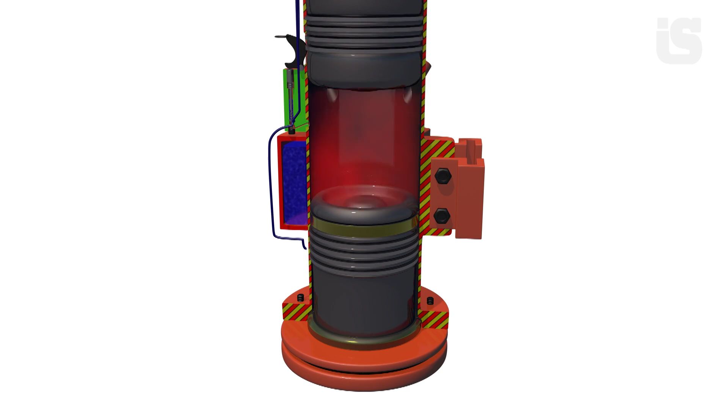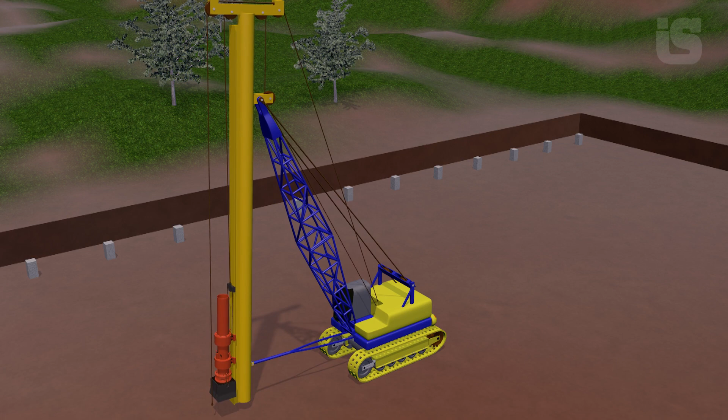Diesel pile drivers are designed for driving reinforced concrete and metal piles and sheet piles into the ground when constructing foundations in both civil and industrial construction. Let's look at a pile driver based on a crane or cable excavator. A diesel hammer with a head attached to it can move along a guide mast.

The pile driver pulls the pile up and sets it in the design position. The driving cap of the pile hammer is placed on the head of the pile. A shock-absorbing gasket made of rubber, wood, or other elastic materials is installed between the pile and the head.

The striking part, hammer, is lifted by a winch and dropped from a height. When the striking part falls, diesel fuel is injected. Detonation occurs. The impact energy drives the pile in, and the energy of the explosion throws the striker upward for the next cycle.

If the pile is deeply embedded at the beginning of driving, the hammer may not start even after several attempts. And when the pile is difficult to drive, the hammer may start. The working hammer is stopped by the tension of the rope attached to the fuel pump plunger lever. Let's take a closer look at this process and the design of the diesel hammer.

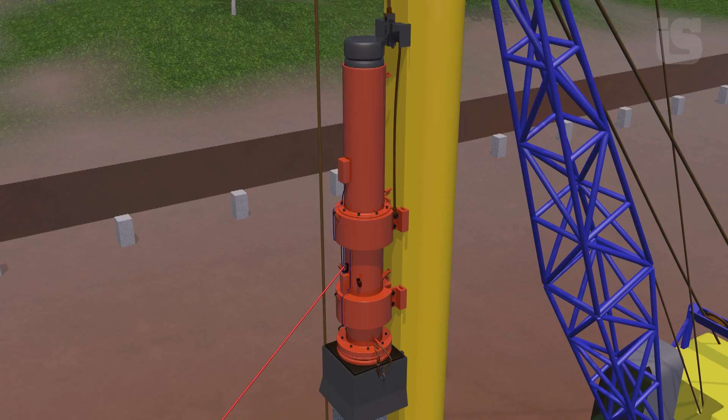This is a driving cap. It is attached to the diesel hammer with slings. There is a shock-absorbing gasket inside the driving cap. The gasket is needed to prevent the pile from breaking. This is a cushioning gasket between the hammer and the driving cap.

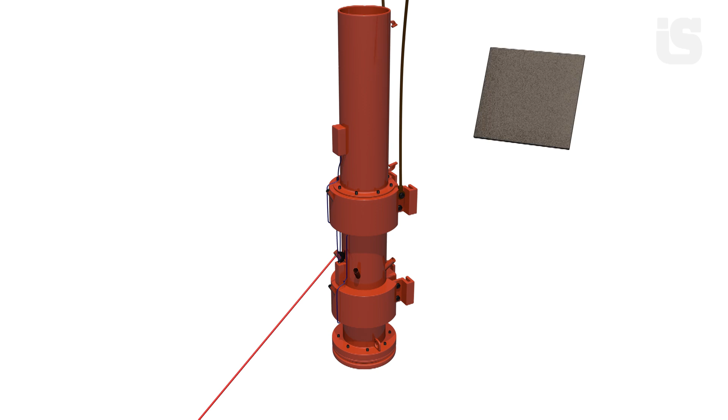This is the guide cylinder. The guide cylinder is a thick-walled pipe. There is a longitudinal slot on its side surface into which the lifting lever fits. Two stops are attached to this cylinder. The stops are needed to switch the mechanism for gripping and releasing the striking part.

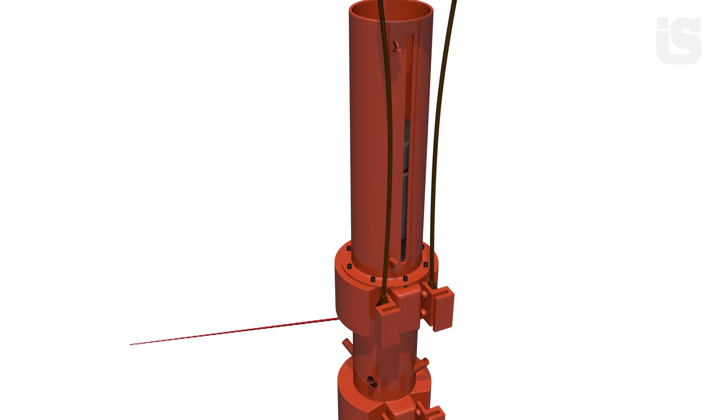This is the working cylinder. In the middle part of the cylinder, there are four exhaust pipes, which serve to suck air into the cylinder and remove exhaust gases from it. The working cylinder also has a slot for the fuel pump lever.

The hammer is water-cooled. A ring-shaped water tank with fill and drain ports is installed in the lower part of the working cylinder. A ring-shaped fuel tank with a fill port is located in the upper part of the cylinder. This is a combined fuel pump. It is attached to the working cylinder.

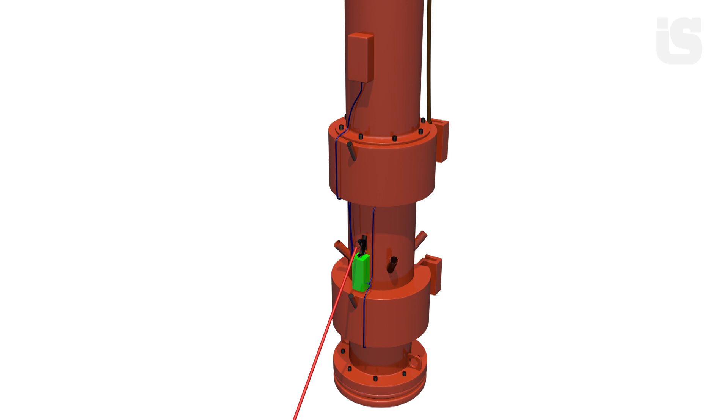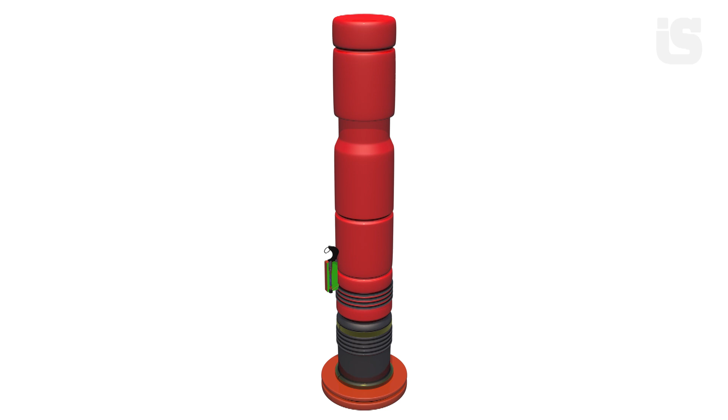Plunger pump, low pressure, used to supply fuel to the combustion chamber and oil to lubricate the piston and anvil. This is the oil tank. These are the oil and fuel pipes. This is the striking part, a heavy metal cylinder. This cylinder, like the piston in an internal combustion engine, has compression rings.

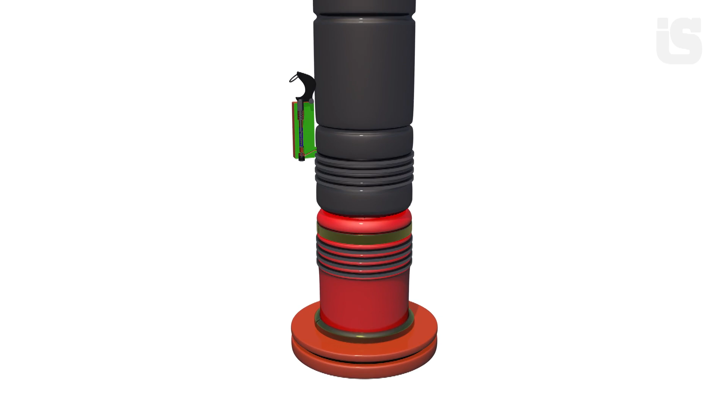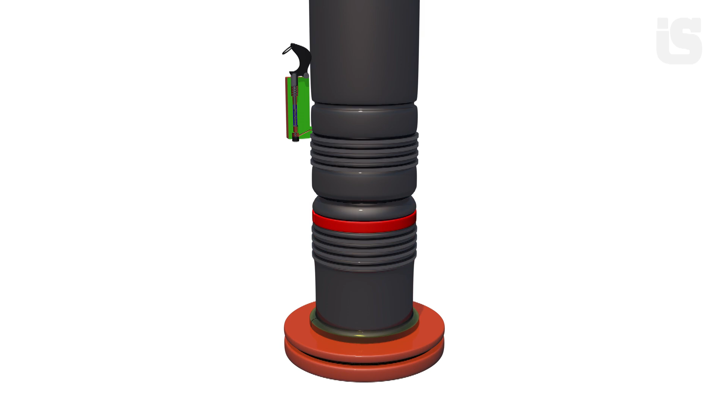This is the anvil. The anvil is inserted into the lower part of the working cylinder and can move along it so that the piston's blows on the sabot do not affect the cylinder. The movement of the anvil is limited by guide bearings. Upper bearing, lower bearing.

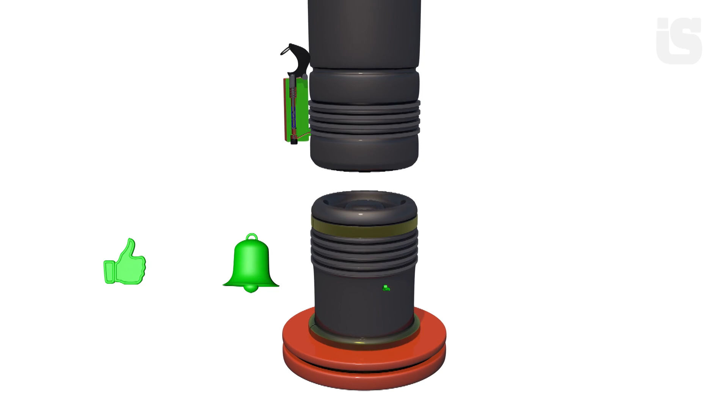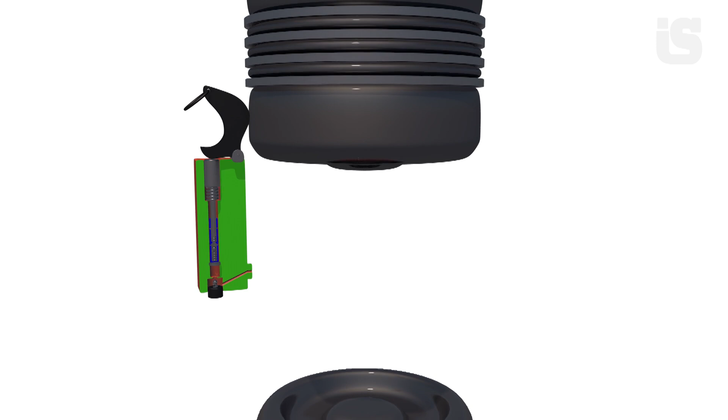When moving down, the impact part drives the fuel pump lever. The lever presses on the fuel and oil pump plunger. When lowered, the plunger creates pressure in the pump cavity. Fuel is injected into the combustion chamber.

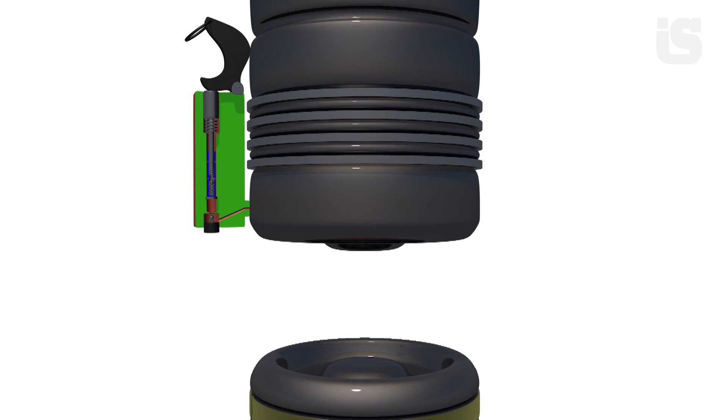Detonation occurs. The impact energy drives the pile, and the explosion energy throws the impact part up for the next cycle. The oil plunger displaces oil through two fittings to lubricate the piston and the anvil.

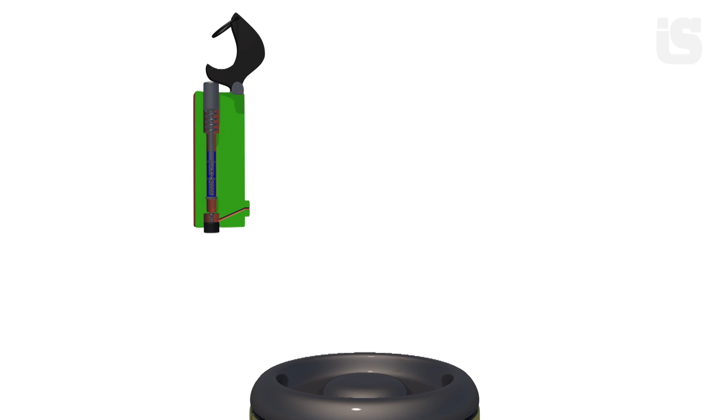Lifting and release mechanism of the hammer. It is a lever mechanism designed for automatic gripping, lifting to the upper position, and automatic release of the piston when the hammer is started. It is also used to lift the entire hammer up the derrick mast.

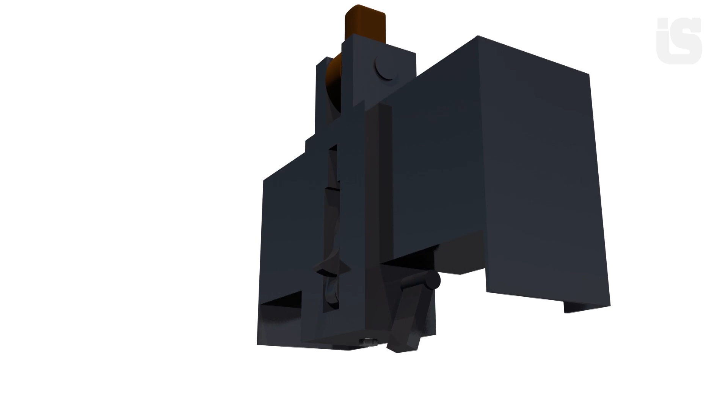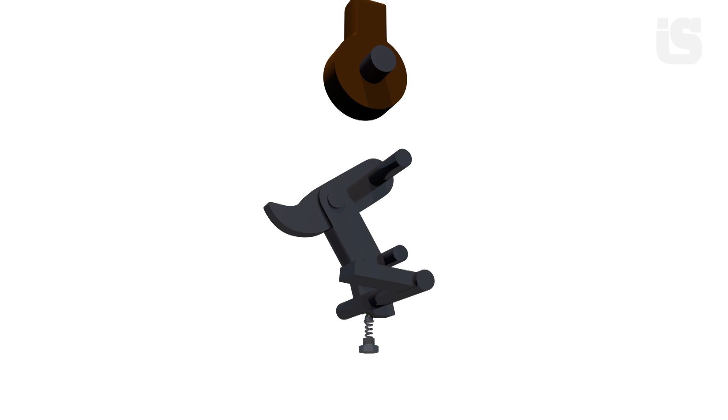It consists of a body and a lever mechanism. The lever mechanism is incredibly simple but amazing. It can occupy two positions, working and idle. In the idle position, the end of the lever is lowered and does not engage with the ring notch of the piston. In the working position, the lifting lever is raised and engages with the ring notch of the piston.

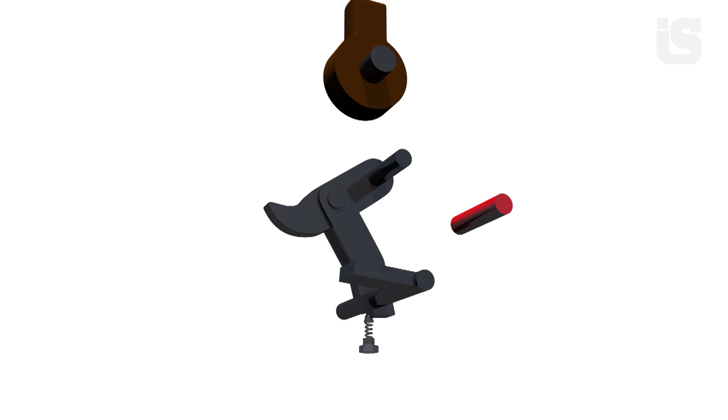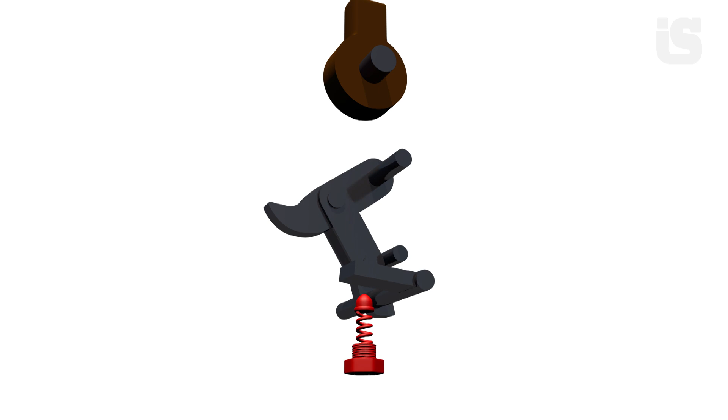In the working position, the lever mechanism securely holds the striking mechanism. The shaft fixed in the housing prevents the lever from turning upward. A spring clip prevents the lever from turning downward. To engage the piston, the lifting and release mechanism is lowered. The lever, pushing against the stop, rotates and brings the lifting and release mechanism into the working position.

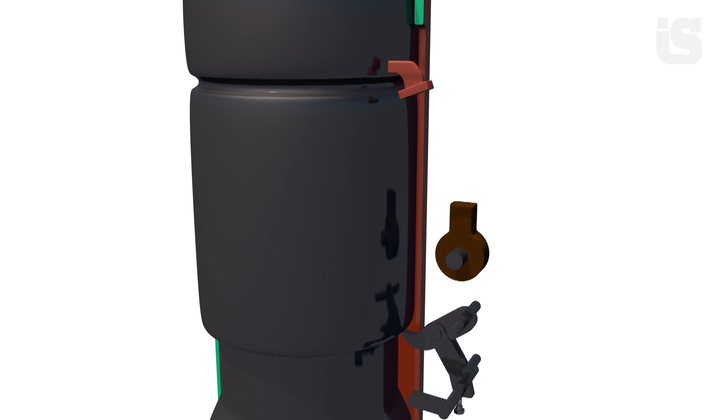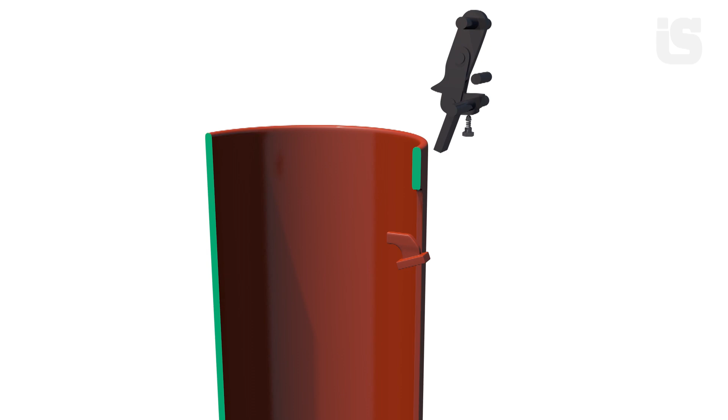When lifted, the protruding end of the lever lifts the piston upward until the lever passes the release stop. When the lifting and release mechanism passes the release stop, the switch lever switches the mechanism to the idle position. The piston falls freely downward.

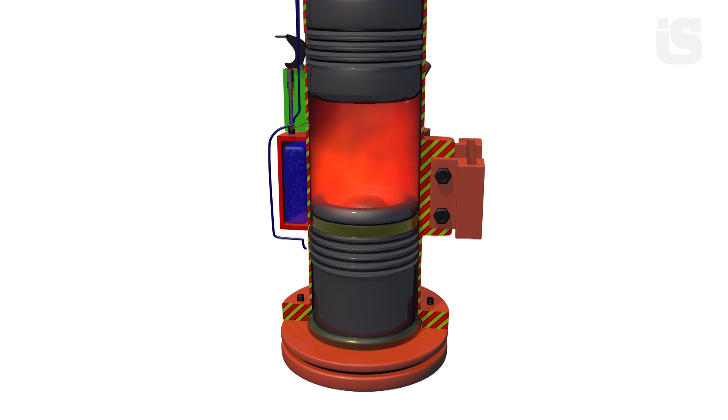The principle of operation of a diesel hammer is quite simple. The piston rises to the stop and then descends with force. The air is compressed during the descent, which increases the temperature, and after a portion of fuel is supplied, ignition occurs, causing the piston to rise sharply. After reaching the top point, the air in the cylinder is compressed again.